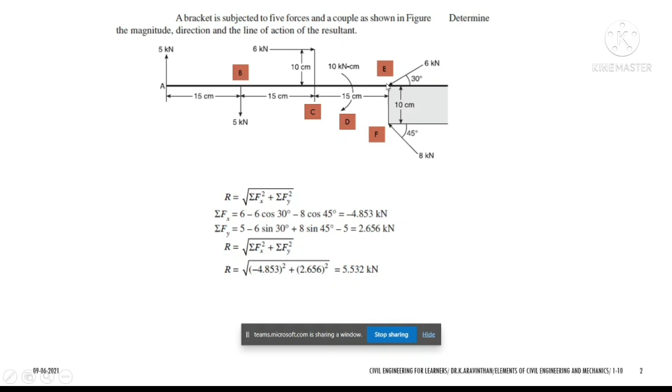At point A you have a vertical force, and at point B you have a vertical downward force. Like that, at each and every point you have forces. Whenever you find an inclined force, you should resolve vertically and horizontally. The inclined loads are 6 kilonewton and 8 kilonewton, at an angle of 45 degree at point F, and at point E you have 30 degree.

I said a concept that whenever you find an angle, it should be along with the horizontal axis. So the angle is with horizontal axis, that is 30 degree. At both the sides you have the angle with horizontal axis, and for all inclined forces you should resolve vertically and horizontally. This is what you have to remember when you are proceeding with the sums.

And also there is a different load. Can you see an arc here? There is an arc at point D, and this is a force called moment. I have earlier explained what you mean by moment or couple. Say for example, if there is a fan or a wind turbine, the blades of the wind turbine always rotate. If that kind of force is there, you will have a moment like this. In a fan you can see the rotor always rotates.

That kind of force is known as a moment, and this is a clockwise moment. Why? Because it rotates in the direction of the movement of the clock. This is different. In the previous problem you have not seen this kind of force, and everywhere they have given the unit in terms of kilonewton centimeter. Between each and every point, that is point A to B, the distance is given in centimeter, and the forces are given in kilonewton.

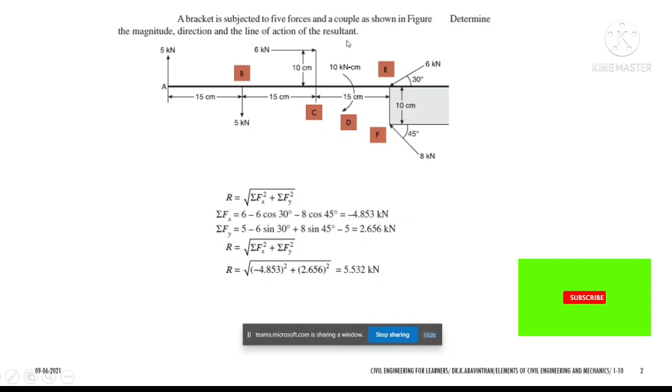In the last problem it was in terms of Newton; if you multiply by 1000 you get kilonewton, so 6 kilonewton is 6000 Newton. Anyhow, let us solve the problem. First thing you need is magnitude. How to find magnitude of resultant? For resultant you have the formula: square root of summation of Fx square plus summation of Fy square. So you have to find Fx and Fy.

What is Fx? You should resolve all the forces horizontally. At point A you don't have a horizontal force, point B doesn't have, but at point C you have a horizontal force of 6 kilonewton acting to the right hand side, so plus 6 is taken here. At point D you don't have any horizontal force. At point E you have an inclined member, which can be resolved horizontally and vertically. We are interested in sum of Fx, the horizontal force, so resolve horizontally: 6 cos 30. It is acting to the left hand side, hence it is minus.

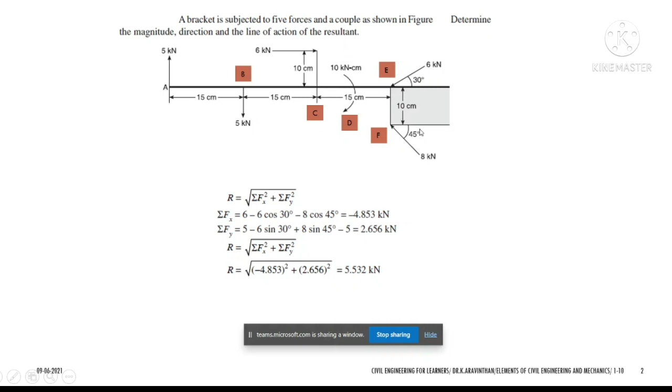So minus 6 cos 30 degree, and also at the point F if you resolve you will be getting 8 cos 45 degree, and this will also be acting left hand side, and hence it is minus. So if you add that, minus 4.853 kilonewton will be your answer.

Summation of f of y. I am taking all the forces along y direction, that is upward. So what are the upward forces? 5 kilonewton is upward, that is plus 5, and 5 kilonewton at point B is acting downward, hence minus 5 is written here. And next, at point E and F you have to resolve this component into vertical, and 6 sine 30 will be going in the downward direction, minus 6 sine 30 degree.

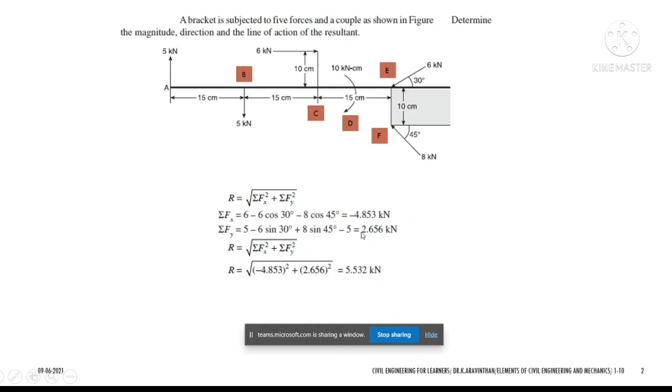And if you resolve 8 sine 45 degree, this will be acting upward, hence it is plus, and plus 8 sine 45 degree equal to, you will be getting 2.656 kilonewton. So you have found out f of x and f of y. You have to square that and root, you will be getting the resultant.

Now we found that, see, you are having 5 number of forces here. If you make all the 5 forces into a single force, then it is 5.532 kilonewton. So you have made all the forces into a single force, but you don't know at which point this force is acting. So let us find that.

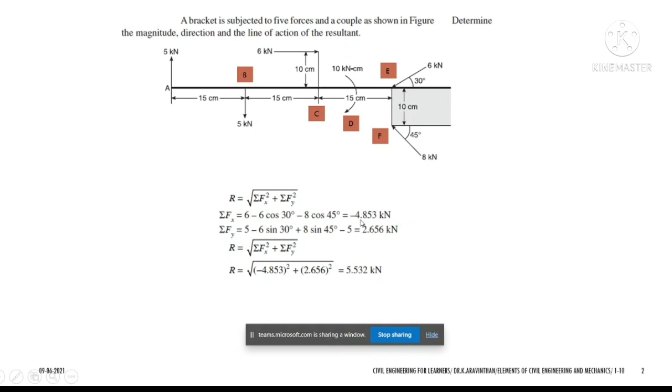Okay, so next thing is theta. You have to find theta. So for that you have a formula of sum of f of y and f of x. So you got f of y as 2.656, and f of x is minus 4.853 kilonewton. And if you divide that, you will be getting theta, that is minus 28.69 degree. So the resultant is found and the angle is found.

Third thing is, you should find the line of action. So for that you need to find the moment. So how to find the moment? Take the moment at the point A. When we are taking moment at point A, the force is acting at the point A, so you cannot consider this force. Why? Because to take moment, the formula is load into distance. So you don't have distance at point A, hence the 5 kilonewton cannot be taken.

And the next force you have is B. At point B you have 5 kilonewton, which is acting downward, and the formula for moment is load into distance. So 5 kilonewton into distance is 15 centimeter. So 5 into 15, which will be rotating clockwise, hence plus 5 into 15 is written here.

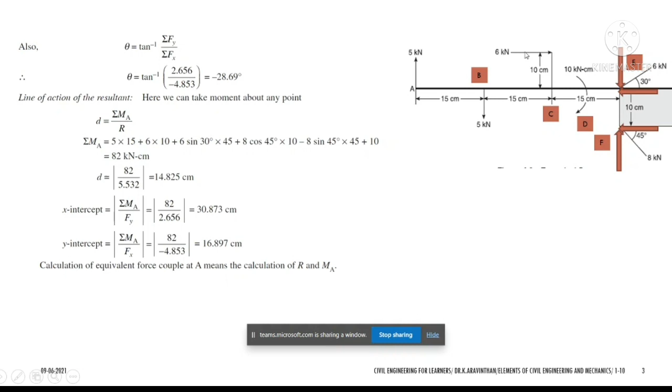And next at point C, you have 6 kilonewton and you are taking moment at point A. So load into perpendicular distance. The load is acting in horizontal direction, hence you have to take the perpendicular distance as 10 centimeter. So note the difference here. You should not take the distance as 30 centimeter. Why? Because the load is horizontal, you have to take vertical distance. At point A, 6 into 10. This will be acting clockwise, hence 6 into 10, which is plus.

And at the point D, you have a moment. The moment is purely given here, hence the value of moment is 10 and it is a clockwise moment. So you can take this as plus 10. No need of taking distance here. If your load is a point load, you have to take distance, but here your load itself is a moment. This kind of arrow indicates a moment. If your load itself is a moment, you just have to take the value, that is plus 10 kilonewton centimeter. That's all. So plus 10 is written here.

And when you are resolving this 6 kilonewton, vertical and horizontal forces will be there. You cannot take the horizontal resolution. Why? Because this 6 kilonewton, if you resolve horizontally, you will have the same line of action, so you will not have a perpendicular line. So 6 kilonewton cannot be taken horizontally.

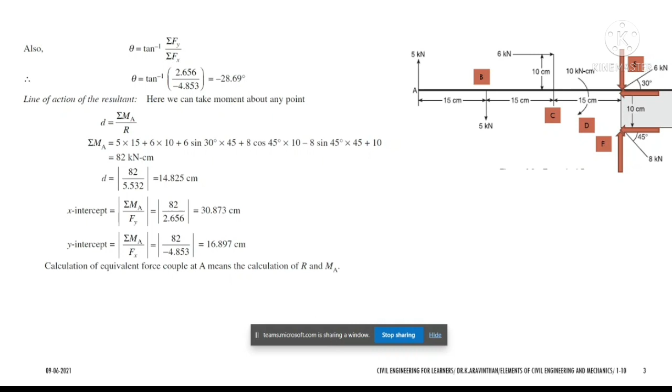So shall I move to next problem? Yes, sir. Okay. Yes. Let us take a next problem.

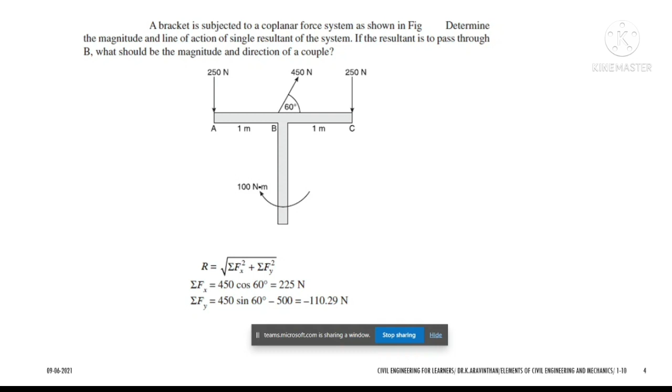Now you have to remember that for a non-concurrent force system you have 3 formulas. First one is resultant, second one is to find theta, and third one is to find the D distance, and if you find D, you will be finding X and Y intercept. So these are the formulas. By applying them, you can easily find the solution.

The given data is: a bracket is subjected to a coplanar force system as shown in figure. Determine the magnitude and line of action of the single resultant of the force system. If the resultant is to pass through B, what should be the magnitude and direction of the couple? So you have to find the magnitude and line of action. First let us find these things, and for finding this you have this formula.

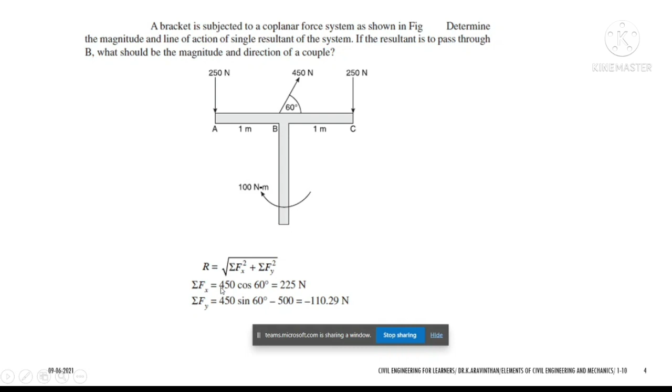First find summation of Fx, all horizontal forces. At point A and C you have 250 Newton acting downward, vertical, and the only inclined force here is 450 Newton. So you can find the horizontal force of this inclined force: cos 60 into 450, acting to the right after resolution. If you multiply 450 into cos 60, you will be getting 225 Newton.

And sum of Fy, resolving all forces vertically, 250 is acting downward and another 250 is acting downward. If you add that, you will be getting 500. So minus 500 is written here, and you can resolve 450 Newton.

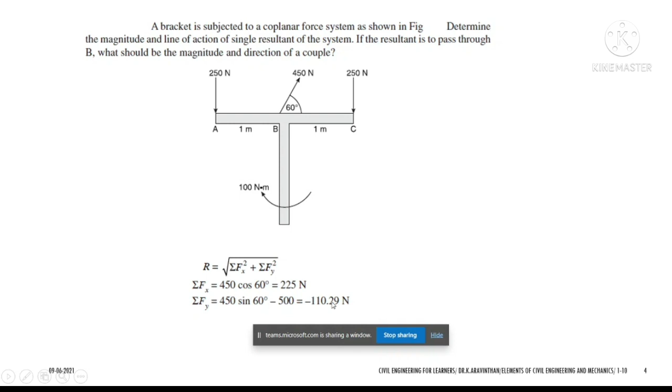Into sine 60, and 450 sine 60 will be acting upward. So if you add that, you will be getting minus 110.29 Newton. Okay. So after that, you can find the resultant. The resultant can be found by squaring and rooting. So whether you get a negative value or positive value, when you are squaring that, all the signs will vanish. So the resultant purely will be positive.

So however many problems you solve, you have to note that your resultant cannot be negative. Why? Because whenever you are finding the resultant, this value has to be squared and rooted, and by doing this process, whatever your value, sum of Fx and Fy both can be negative, but even though it is negative, after substituting here, you will get the resultant as a positive force only.

Okay, and you can find d here, and to find d you need to take moment. So let us take moment at A. Here a small letter is given, summation of M suffix A, meaning you have to take moment at point A. So if I take at point A, I have a force at C. So 250 into the distance, which will be 2 meter. This will be acting clockwise, so 250 into 2, that is plus.

And you have a 450 Newton force at the point B. This is inclined, so you have to resolve it. If you resolve vertically, 450 sine 60 degree will come, which will be acting anticlockwise, so minus 450 into sine 60 is given, and its distance is 1 meter. And I earlier indicated 100 Newton meter, which is a moment. Whenever you are taking moment here, you just take the 100 as it is, no need to multiply with a distance.

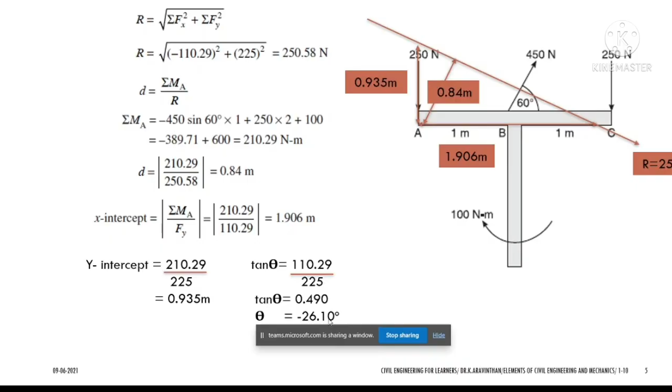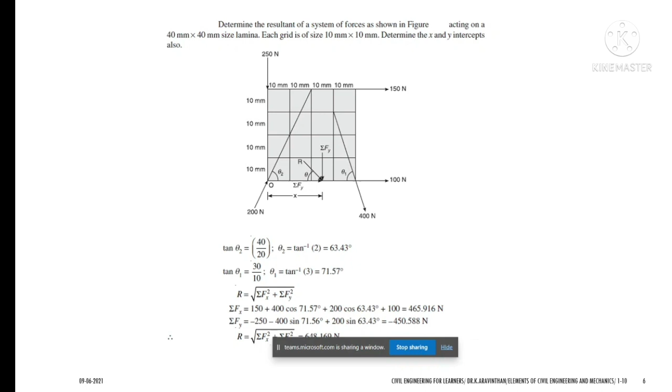you will be getting 465.916 Newton, and if you find Fy, you have 250 Newton which is downward and is minus, and you can take 400 sine 71 which is minus, and 200 sine 63 which will be plus. Okay, if you add that, you will be getting minus 450.58 Newton, and the resultant will be 648.16 Newton.

Okay, so you can find tan theta here, it is minus 44.04 degrees. So the resultant is indicated here. You can see that it is acting in the downward direction and the angle is minus 44.04 degrees. So next you have to find the moment at the point O.

If you take moment, 150 is the force which is horizontal and the distance is 40, so 150 into 40, load into distance, which will be clockwise, and the second force is 400 sine 71 degrees, which will be acting clockwise. The rest of the forces don't have distance, so you cannot take 250 Newton. Also 100 Newton is acting along the axis, hence you cannot take these forces, and you got the answer as 21,178.9 Newton mm, and the x and y intercepts are taken as 47 mm and 45.45 mm.

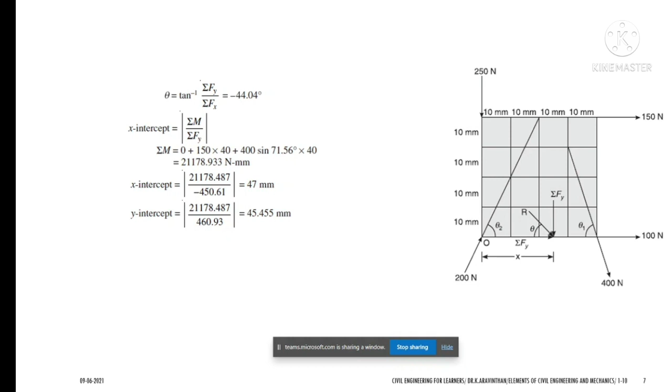Okay. Determine the magnitude and direction of the resultant force for the force system as shown in the figure. The same plane is given here, and you can see a moment which is acting at 8 kilonewton meter. They have given a slope of 1:2, that is, one vertical, two horizontal distance. So you know the concept of how to find theta if a slope is given.

What you have to do is consider this as a triangle, and for this triangle, how will you find theta? You can find it by using opposite side by adjacent. You can take tan theta, and the opposite side is 1, adjacent side is 2. So 1 by 2 will be tan theta, and if you want theta you can take tan inverse, and you will be getting minus 26.56 degrees, and the degree is found with respect to the horizontal, and the rest of the things are the same.

Locate the resultant force with respect to the point D. Now, so far you have taken moment with respect to point A. In the given data, they have indicated to locate the resultant with respect to point D. You can locate it with point C or point B, anywhere. There are 4 points. What you have to do is just take moment with respect to the point which is given.

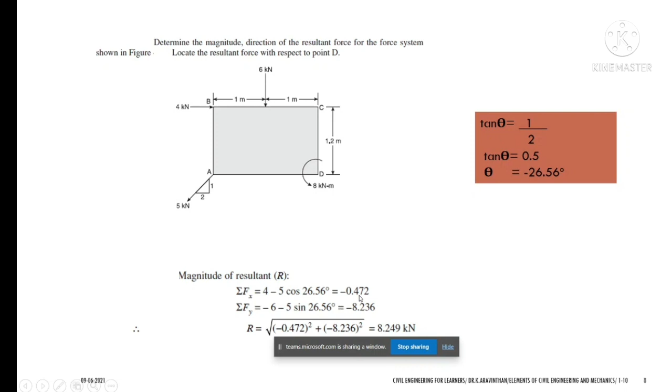And next thing is you have 4 kilonewton which is acting right hand side, and plus 4, answer is minus 0.472 is Fx, and Fy is minus 6. Why? It is acting downward, and 5 kilonewton, if you resolve vertically, you will be getting 5 sine 26 degree. So minus 5 sine 26 degree, that's all. So these are the two forces, and you can find the resultant by using this answer.

After finding the resultant, you can find the angle alpha by dividing sum of Fy by Fx, that is 86.72 degree. So now let us take the moment at D. So if I take moment at D, I have a moment which is acting at point D itself. So it is an anti-clockwise moment. Okay, then you have to consider this moment as minus 8. So you can see here minus 8 is considered, and you don't have any distance for a moment.

Just take the moment, and if you resolve 5 kilonewton into horizontal force, you will not be having any moment. You have to resolve this vertically, that is 5 sine 26 degree, and this will become vertical force. Now you can take the distance. So what is the distance from point D? 2 meter, and 2 into 5 sine 26.56 degree, which will be acting anti-clockwise. And next thing is 6 kilonewton into distance is 1 meter, and this will also be anti-clockwise, hence minus 6 into 1.

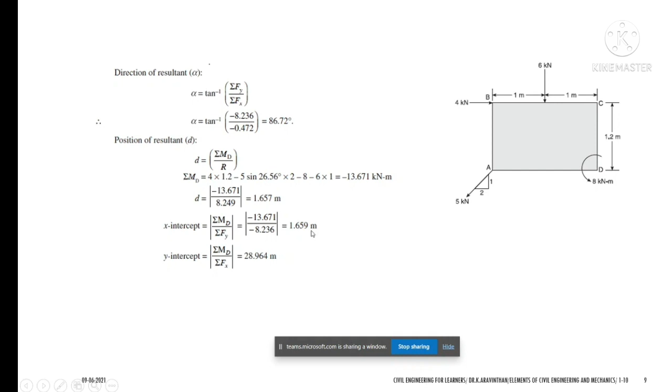Finally you have 4 kilonewton and its perpendicular distance is 1.2 meter, and this will be clockwise moment, hence 4 into 1.2. And after finding sum of MD, you can find the D intercept, which is 1.657, and X and Y intercept you have found by using this formula.

So now it's open for discussion. So throughout this module 1 you can discuss if you have any doubt. So from next class we can discuss the module 2.

Sir, if we study this method is it enough for exam, sir? Yeah, so see, there are number of books available. R.K. Bansal book is available, and other local authors are available. There are n number of methods to solve a problem. So in each and every book you find a different method of solving a problem, and I insist you to follow this procedure. See, for each and every kind of topic, I have a method of analyzing easily. So if you follow this method, whatever might be the given data, you can easily find the requirement.

So in a different book, the way of solution will be different, and the author will be explaining it in a different mode. By their experience, each and every person has their own way of solving. So what I suggest you is, see, I have found a method of analyzing the problems throughout all the 5 modules, which I will be discussing with you. From your other classmates, you can search notes, and they will have a different way of solving. It is okay if you find the answer correctly and all the procedures are right. So you can reach the destiny.